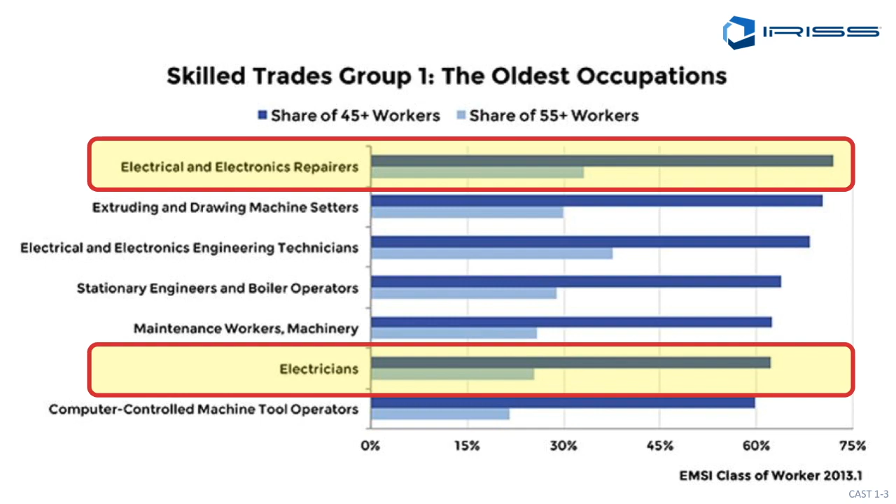Why do we need effective electrical maintenance programs? So obviously, for those who have been involved in maintenance and reliability for a long time, we have very well established mechanical reliability and maintenance systems. And if you look at electrical maintenance, it's sort of been the red-headed stepchild of maintenance for some reason. But that's changed slightly in the last few years, and we're seeing a quantum shift now towards people looking at the reliability of their electrical systems.

But this is the issue. The same old thinking and the same old results. What we're seeing now is the way we used to do things is not working. If you look at it, the equipment that we were working on 25 years ago is similar to the equipment we're working on now. However, there have been advances in the mechanics of the systems, but we're still utilizing the same maintenance. That doesn't work.

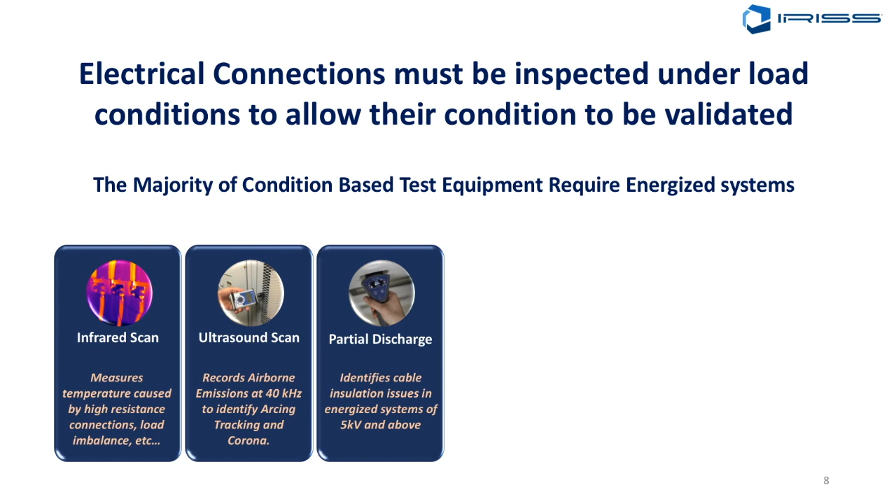Now, what we tend to look at in condition monitoring: we use infrared. Ultrasound, so with ultrasound we're looking for 40 kilohertz emissions. Partial discharge; now, partial discharge is typically over 4.5, 5 kV, but we can do PD inspections. Motor current analysis; this can be done energized and de-energized.

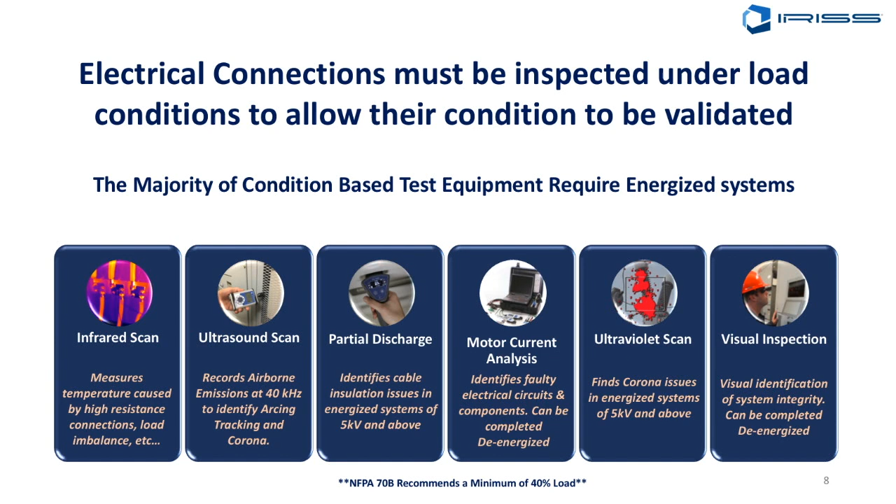Ultraviolet is being used extensively now, especially in the power generation fields. Again, it's for identifying corona over 5 kV. And the most important thing is visual inspection. So this is what we do. If you look at the core fundamentals of condition monitoring, these are the tools and techniques that we will use to identify the condition of the actual systems or circuits that we're looking at.

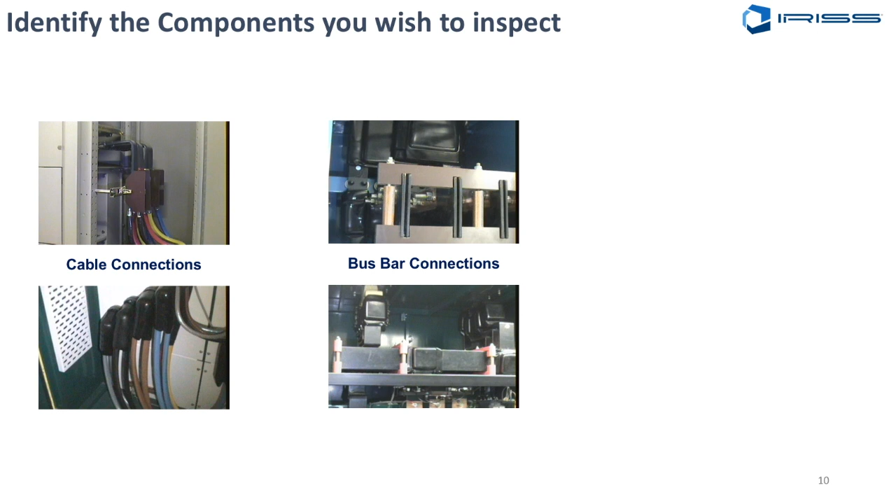So where do we start? Failure modes effects analysis. Now, with that failure modes, first and foremost, we want to identify the components that I want to inspect. So in electrical systems, they're typically cable connections, bus bar connections, and isolator or circuit breaker connections.

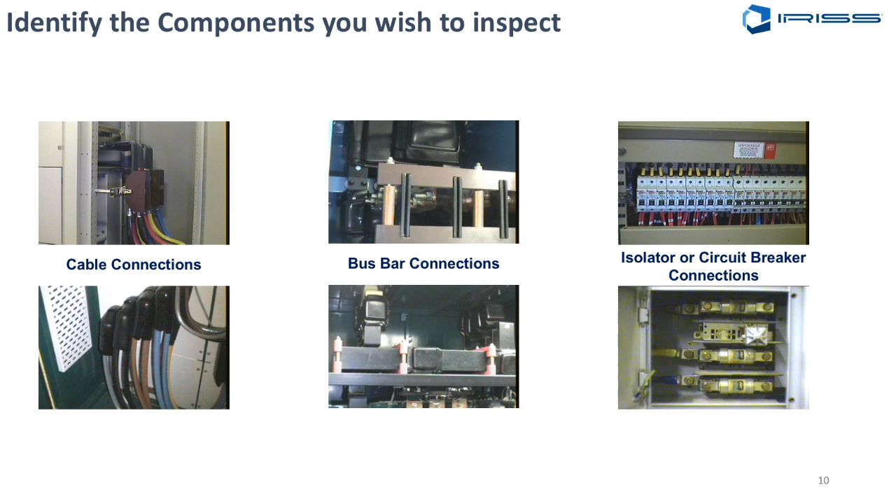Other than through human intervention, I don't really see bus bars failing or cables failing outside of their joints or connections, and that's a broad spectrum thing. There are systems that do fail like that, but again, these are typically where we're looking: cable connections, bus bar connections, and the isolator and circuit breaker connections, the mechanical parts of the system.

So what I have here is a good electrical connection. Traditional testing for this type of task, and we have to shut down. We can maybe do load bank testing, megger stress testing, tightness, torque checks, etc. There's a whole bunch of testing I can do on this circuit to show that it's correct. Now, all these maintenance tasks are designed to confirm whether or not the circuit connections are good and the systems meet its operational requirements.

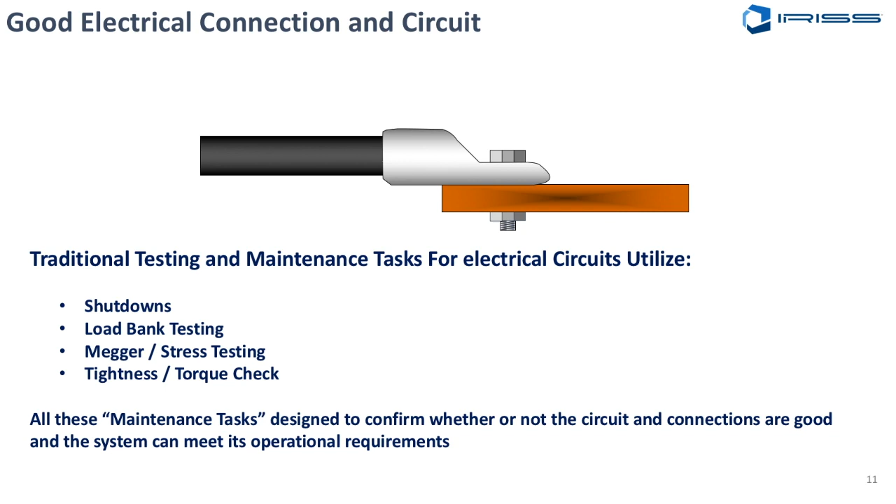Okay, so this is why we do this shutdown and this testing, but it's antiquated. You can only tighten a bolt or a screw or a nut so many times before it breaks. And we've seen people where they've tightened the connection because they think it's a loose connection, but it's not. It's a lug or something that's causing the issue. So there's better ways that we can do this.

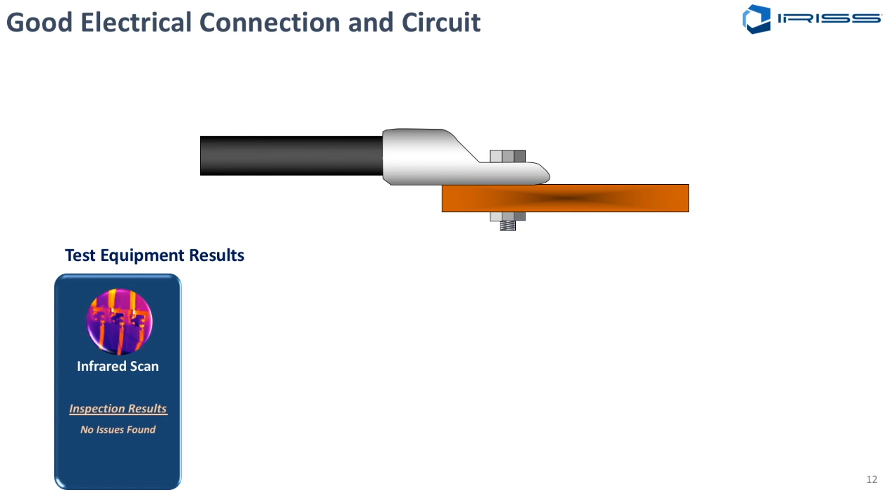Now, if we look at this circuit, I'm going to do this through condition monitoring. So the infrared shows 0, ultrasound shows 0, PD shows 0, motor current analysis shows 0, ultraviolet shows 0, and there's no issues with the visual inspection. Here I've done all of these tests, and there is nothing wrong with the connection. Now, that really to me means there's nothing physically that I can do from a maintenance intervention standpoint to make this connection any better. I've proven to you by looking at this connection that there's nothing wrong with it. So we just move on.

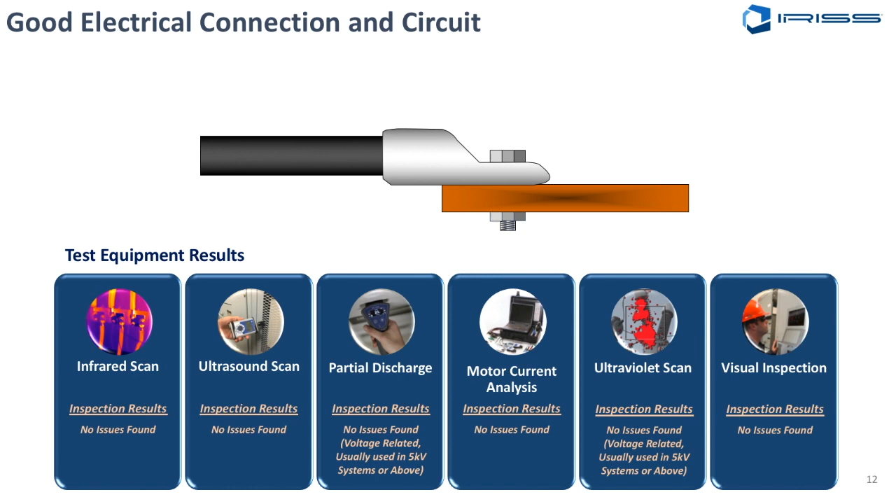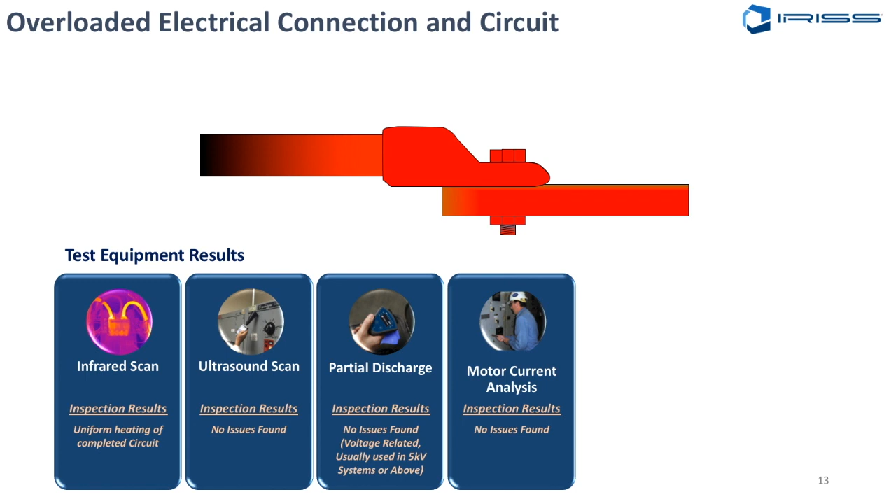Yeah, we move on. Now, if you look at an overloaded electrical connection, by utilizing the same test equipment, the infrared scan is going to show me uniform heating of the circuit. Ultrasound possibly is not going to show me a lot at this stage. PD, again, if it's over 5 kV, we might see them, but again, for overloads, this isn't really a circuit failure, this is a system failure. So we're not going to see anything. Motor current analysis, possibly not, only from the load readings, obviously.

Ultraviolet scans are not going to show me anything, and the visual inspection, only in super extreme cases where the heat damage has got so much on the cables, will we see the visual verification of that fault. So all of this we're looking at, and there's nothing wrong with it. So again, with this we can see an overloaded electrical connection, and we can do what's required to bring that back into the scope of works that's needed.

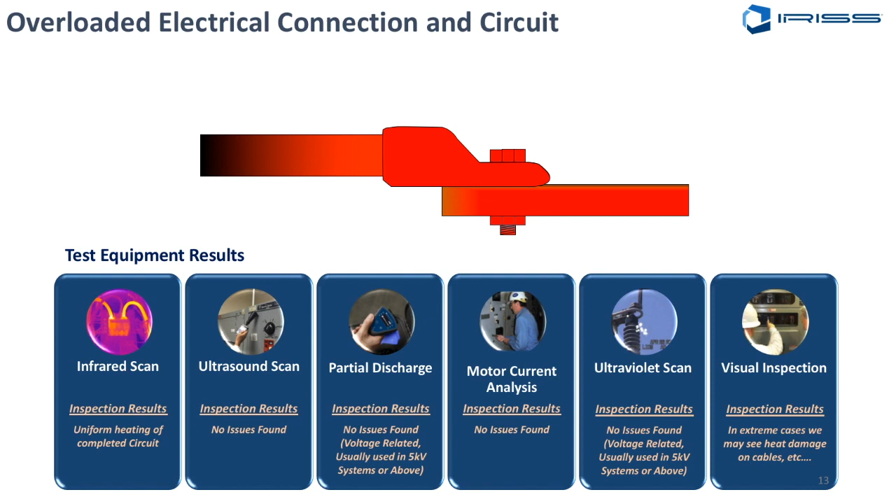Now, if you look at a high resistance or loose connection, here with the infrared, I'm going to see localized overheating. The ultrasound, again, I may find arcing, tracking, or corona. Corona obviously depends on the voltage, but on the medium to low voltage, we're going to find arcing or tracking in extreme cases. PD, possibly not, only if it's 5 kV or above. Motor current analysis, yes, I'm going to find this. Ultraviolet scan, again, only if 5 kV or above.

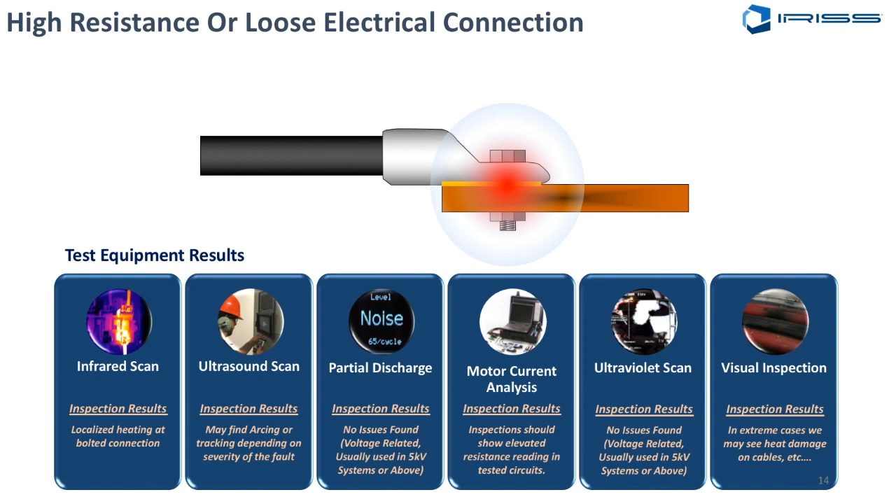And the visual inspection, again, in extreme cases where it's got that hot, where it's actually visually discolored the system, the circuit, we can see the evidence of that. So again, now I can utilize these condition monitoring techniques to show me if I have a high resistance or loose connection. Now, another area where we have some similarities is obviously a loose cable lug. That is going to give me identical results to a loose or a high resistance connection, but the actual high resistance is now in the lug and not in the bolted connection.

So I'm going to get all the same results. So what we say here is typically, as an electrical engineering firm, we would advise that if you find an overheated connection, you would actually cut the lug off. You would replace the lug so the whole system is good and rebuild it.

Now, the reason we do that is if you're shutting down to do this, the last thing you want to do is go back in and change it, and say you need another shutdown because it wasn't the actual connection that was loose, it was the lug. So, to save yourself embarrassment, just cut the lug off, replace the whole joint, and then you have a good system there in place.

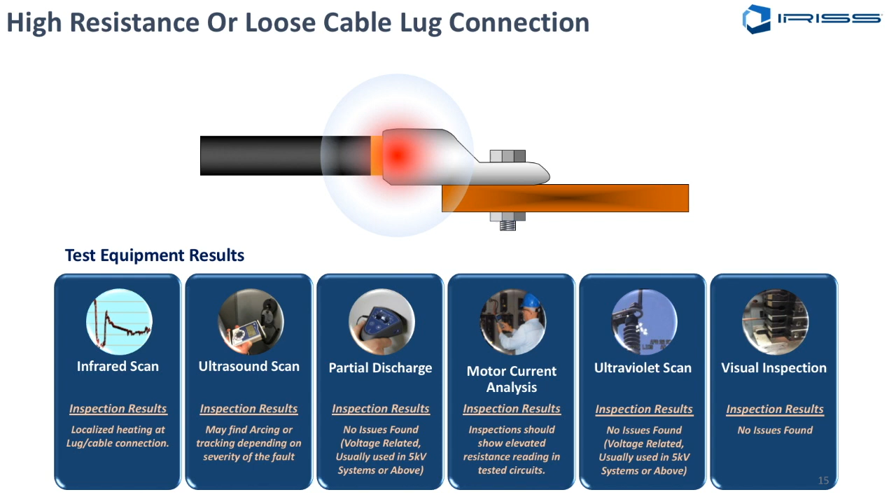Now, the final failure mode we're going to look at is partial discharge or cable insulation failure. Typically, partial discharge doesn't produce heat. Only in very, very extreme cases have I seen reports of heat being produced. But then we're getting into the arcing and tracking side of life. So typically in infrared, no heat.

However, with ultrasound above 5 kV, we're going to hear corona. Partial discharge scanning using PD or UHF scanning, we're going to see that again. Don't forget, PD is typically 5 kV or above. Motor current analysis, we're probably not going to see much. Ultraviolet scanning, yes, we will see something, again, over 5 kV.

And then obviously the visual inspection is super important, because the mechanical failures of partial discharge produce acids which produce residues, white residue, which a lot of electricians have seen. And this is very important to find. Okay, so very important to find, and it really underpins the importance of a visual inspection.

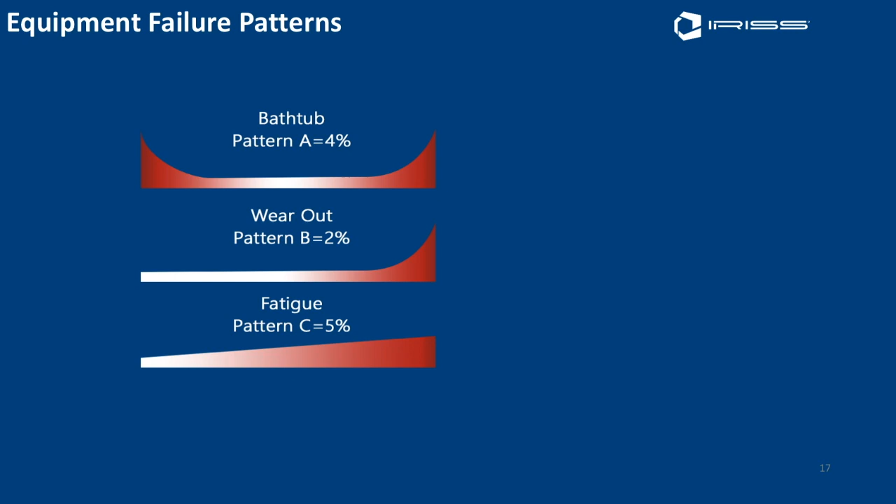So once we've identified the failure modes, we're going to start looking at failure patterns. Now, there are typical failure patterns. We have what we call age-related failures and non-age-related failures. If you look at these typical failure pattern curves here, you're going to see that about 11% of failures are age-related and 89% of failures are non-age-related. Now, these numbers can change significantly, but the ratios tend to stay the same, where age-related failures are responsible for a lot less of the failures that we see than the non-age-related failures.

So what that really tells me is if I'm using a calendar-based maintenance schedule, which is a typical mindset and thinking, I'm only going to find the age-related failures. That methodology of using calendar-based maintenance is typical of traditional thinking, which is the bathtub failure curves or the age-related failure curves. Therefore, that will deal with that. But what we've shown is, if most of the failures are non-age-related, then you're going to be condition-based to find these non-age-related failures.

So this is the quantum shift. Start thinking that way. Start thinking about reliability and maintenance as being two different things. And what we're trying to do now is use condition monitoring to assess the reliability of the system. That really is starting to look at finding these non-age-related failures, which are the cause of the majority of the failures that we're going to see in our systems over its life cycle.

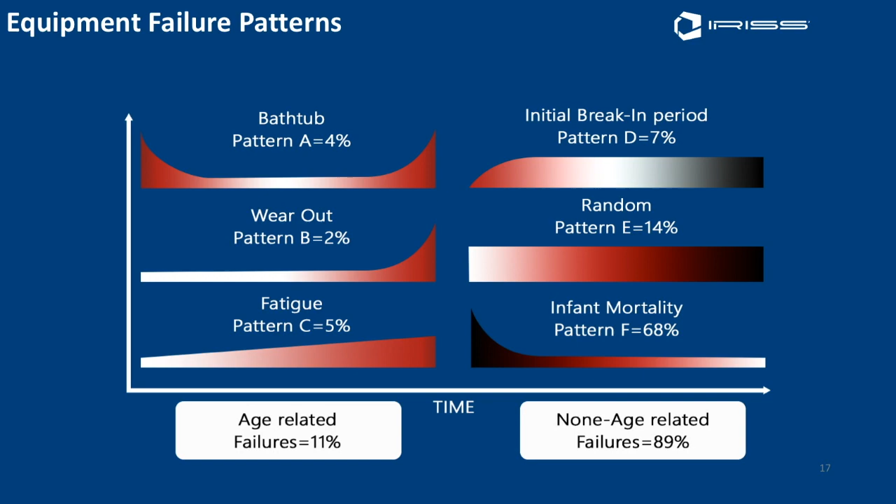Now, I'm going to introduce you to something called a DIPF curve. Most people call it the PF curve, but the DIPF curve is really where we've extrapolated that out for the whole life cycle of the system. So in DIPF, D is design. With design, people are now starting to look at, from an asset management standpoint, if we design it correctly, we're going to have it done right.

So a big part of design is getting the OEM involved right up front. The OEM is going to be there to really assist you on designing the reliability into your project. And these directly impact the following statistics. As much as 60% of failures and safety issues can be prevented by making changes in design. 80% or more of the facility's lifecycle cost is fixed during the plan, design and build phases.

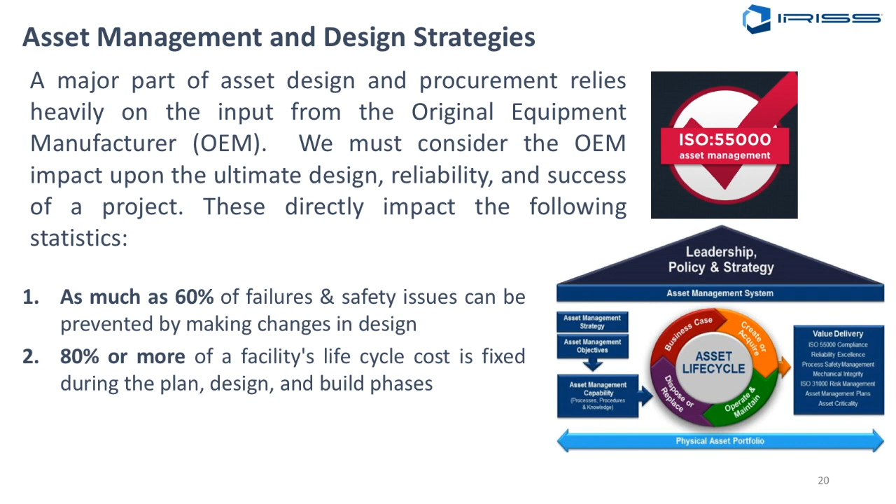So again, getting it right up front is really going to pay back over the total cost of ownership or the life cycle of the asset. And finally, 30 to 40% of equipment breakdowns are related to poor equipment design or condition. So again, getting it right up front at the design point of the life cycle curve is really going to give long-term paybacks.

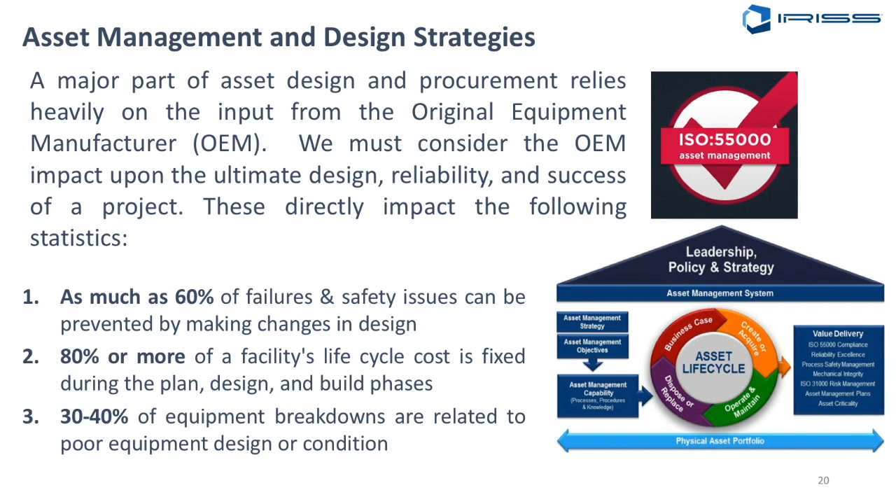Now, a term I hear used a lot is designing for reliability, so system design or design for reliability. Primarily there are three principles in system design for high availability engineering.

Number one is we try and eliminate single points of failure, to add in redundancy to systems, so failures of components doesn't mean complete or entire system failure. Secondly, we need reliable crossover points. Unfortunately, sometimes the crossover point tends to become a single point of failure, so high availability engineering provides reliable crossover.

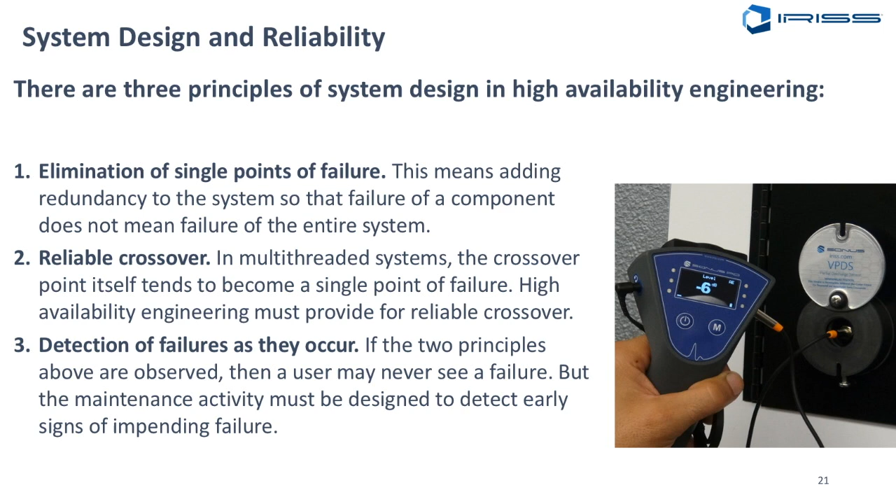And then finally, the detection of the failures as they occur is super important. So if the two principles above are observed, you may never see a failure, but your maintenance and reliability activities must be designed to detect early signs of failure. Now the I part of it obviously is the installation. So design and installation is a big thing on there.

And here we start to see, if we look at the DIPF curve, P is point of potential failure, F is a functional failure, and after functional failure we have total failure. In between installation and point of potential failure is what we call a proactive domain. That's where we're starting to do all this condition monitoring. Now when we find a problem, point of potential failure, then we're starting to work in the predictive domain, and then we go into what we call our fault domain.

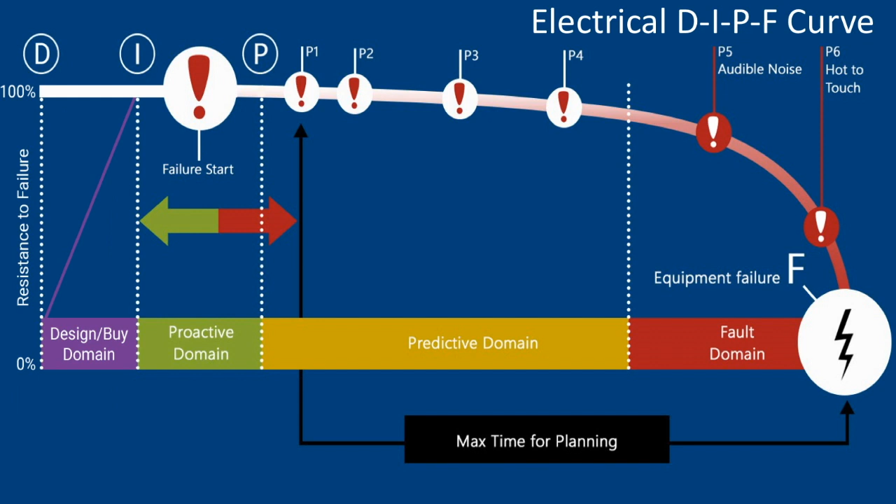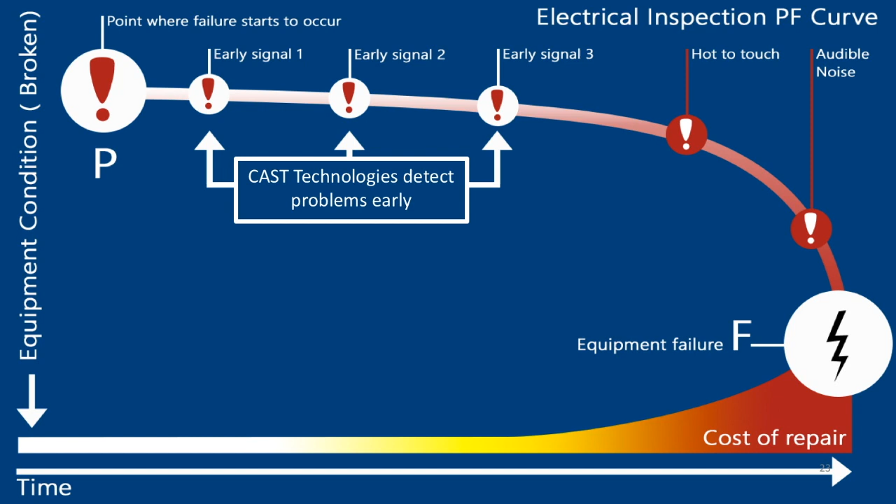So if we break into this a little bit more, we can see here that from the point of potential failure, we're going to look at these early signals, and I'm looking to utilize CAST, critical asset surveillance technologies, to detect problems early. So if we can find these problems early, we can repair them early. And obviously, if you look at the graph here, the bottom line, the cost of repair, the longer you leave it, the more expensive the cost comes to repair.

Now, breaking into the PF curve, let's have a look at early signal one. At this stage, we're going to use the primary tools in electrical inspections: ultrasound, partial discharge testing, infrared, motor current analysis or voltage and current measurement, and the visual inspection. So, using that equipment and looking at the results, we may detect corona, which sounds like this. And remember, corona is voltage dependent.

Your motor current analysis may start to show slight increases in the resistance measurements at this stage. There should be no abnormal thermal patterns detected. But all the time we're doing this utilizing EMSDs, electrical maintenance safety devices, such as IR windows, ultrasound ports, voltage tap-off ports. The panel stays closed and guarded all the time. It's a very quick and easy inspection done under full load condition.

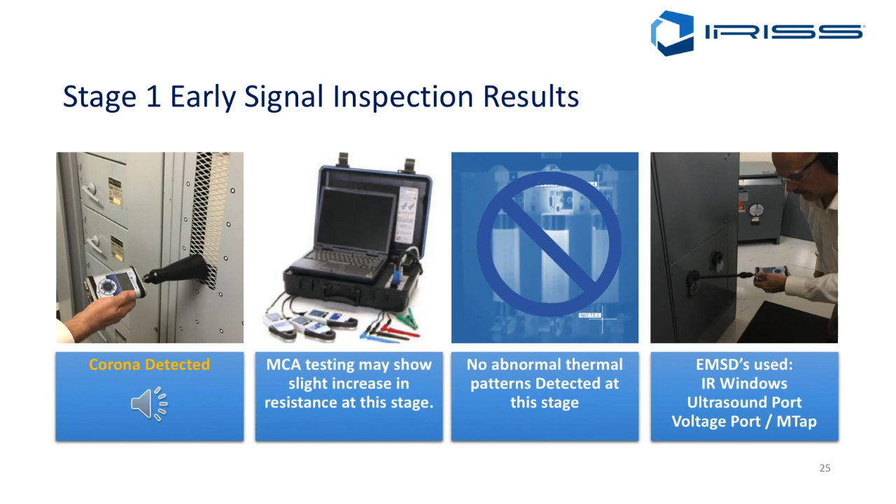Now, if we allow this to go further, we'll get to what we class as early signal 2. Again, we're utilizing the same equipment, but the results will start to escalate as we go down the failure curve. The ultrasound is going to hear tracking, which sounds like this. Motor current analysis should start to show differences in the readings that we would expect. And now we're going to start to see heat being generated. But again, systems are closed, fully energized. One person is doing the inspection through the EMSDs, so nobody's in harm's way.

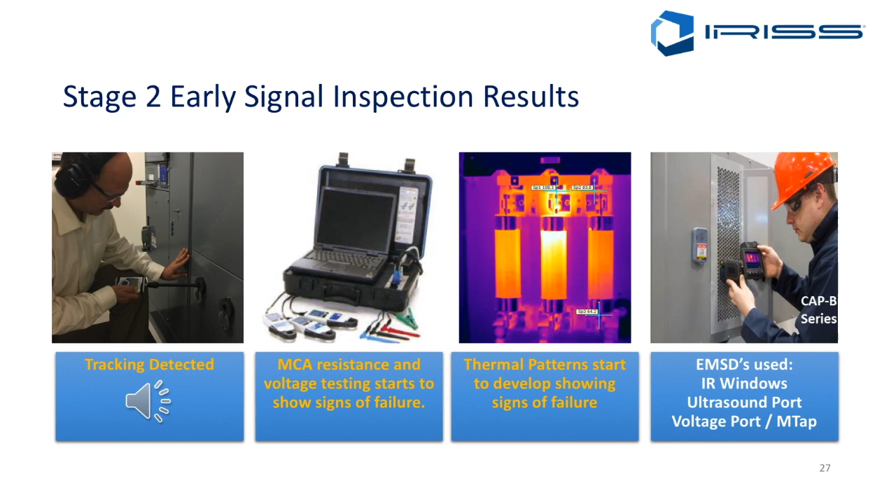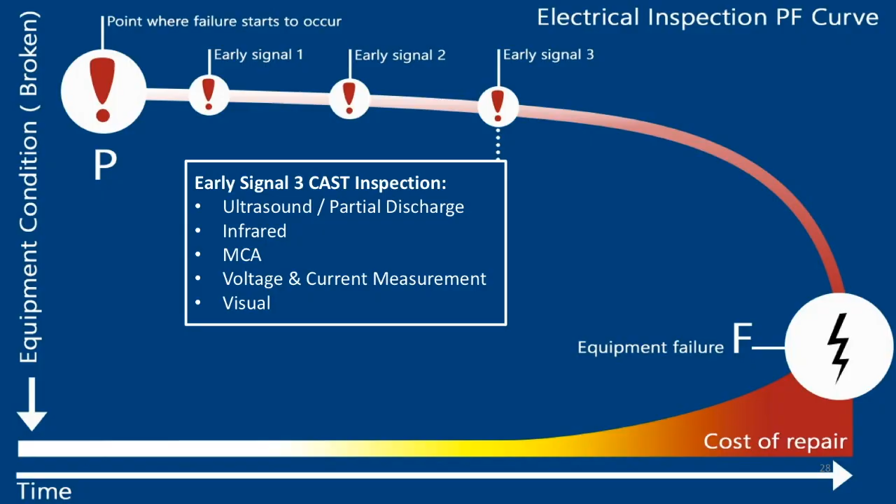So if we leave it to continue, we're going to get continued decay in the issues we're finding, up until the final stages of failure with an electrical system. So here we're going to hear arcing. Tracking will develop to arcing, and if you hear arcing, you're at the final phase of the fault. Motor current analysis readings are going to be significant again, and thermal patterns are going to be increasing.

Again, all the time utilizing EMSDs, the panel remains in an enclosed and guarded condition, and is relatively safe even in this dangerous condition. You definitely wouldn't want to open the panel where we are now. So arcing sounds like this. That's a very distinctive sound, and if you hear this, you definitely don't want to open a panel.

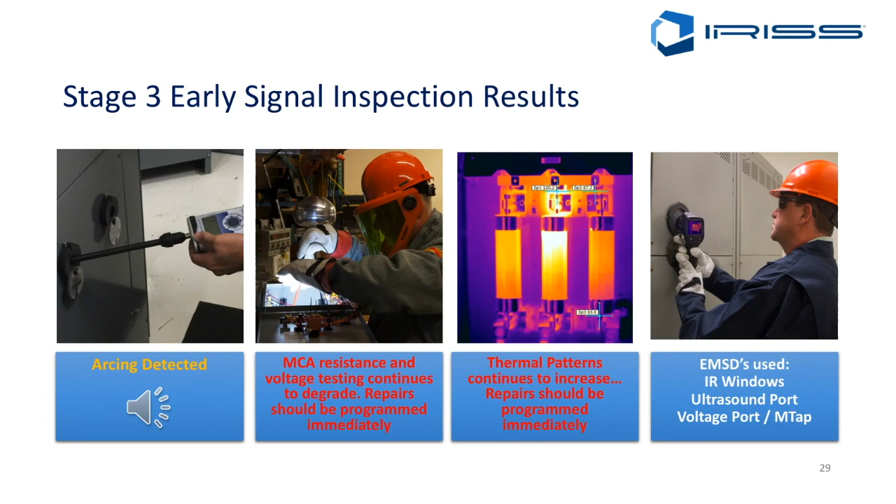So the final phase of failure is when we're going to start to see things be hot to the touch. You might smell burning. You may hear something. This is when the cost of repair is off the chart, and things have just gone too far. So the benefits of finding this stuff early is we repair it in a timely fashion, in a much more cost-effective manner, before things get any worse.

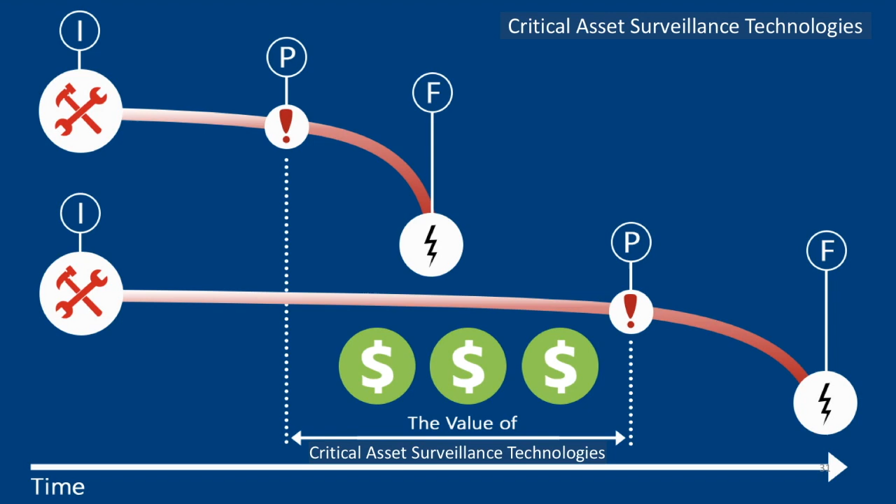Now, when you look at the true value of condition monitoring, or CAST, it is that we can extend the life cycle by finding these points of potential failure early, repairing them early, so no significant damage is caused to the system, and that way we can just build it out and it works fine.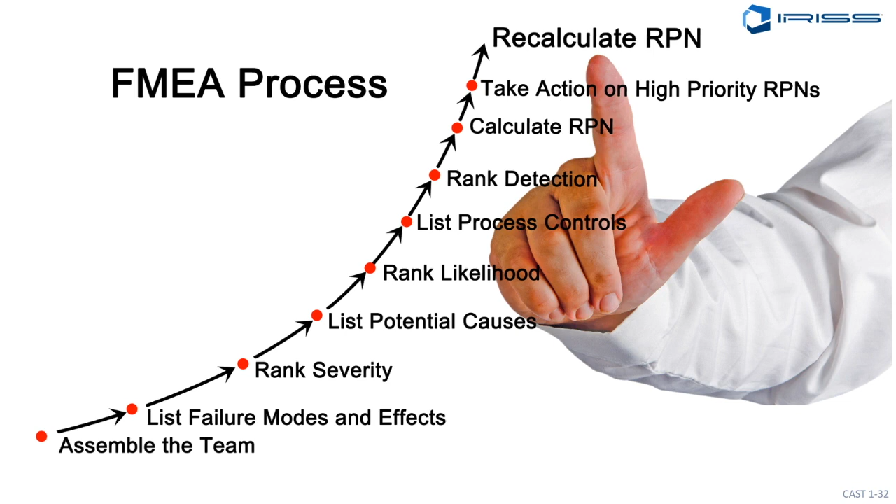So the final part: electrical maintenance now is very heavily risk orientated. One of the things we have to calculate when we're looking at failure modes effects analysis processes is something called an RPN, or a risk priority number. There are different ways of calculating this, but this is the most used. We typically use three areas. We look at the severity, i.e. the severity of failure from 1 to 10; anything affecting life or limb would always be a 10. But the severity is based on business risk, human risk, financial risk, whichever drives your facility.

Second thing is the probability number. So how likely is that fault to occur? From either historical analysis or mean time between failure data, there's lots of things that we can get for the probability number. And the final thing is the detection number. How easy is it to detect these faults? Okay, so each one of those carries a score from 1 to 10, which basically gives us an RPN of anywhere between 1 to 1,000.

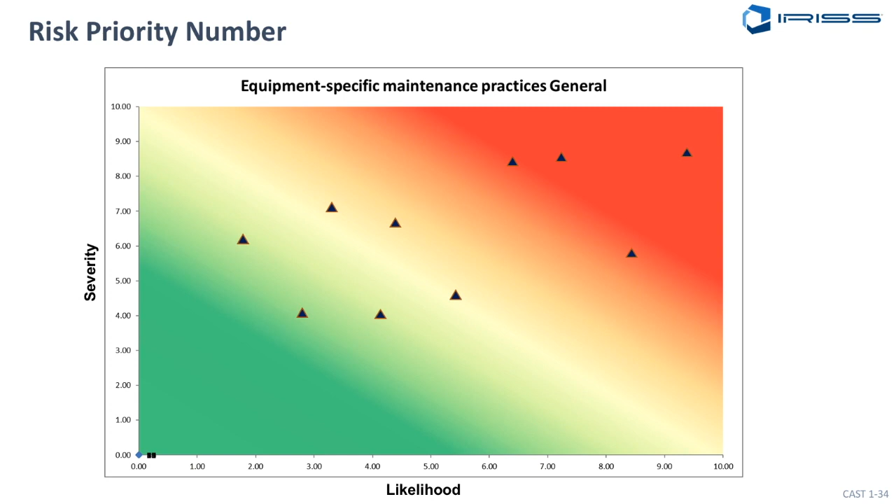Once we calculate those RPNs, we would plot them on something called a heat map, or a risk matrix. There's lots of different names for this. By placing them on this heat map, we start to look at something which many clients call the risk appetite. Risk appetite really is: you need to understand the risk to the business of the failure of your critical assets. You take the results of that risk assessment and utilize that in your heat map when looking at your maintenance and reliability requirements, and you would plot where your things are.

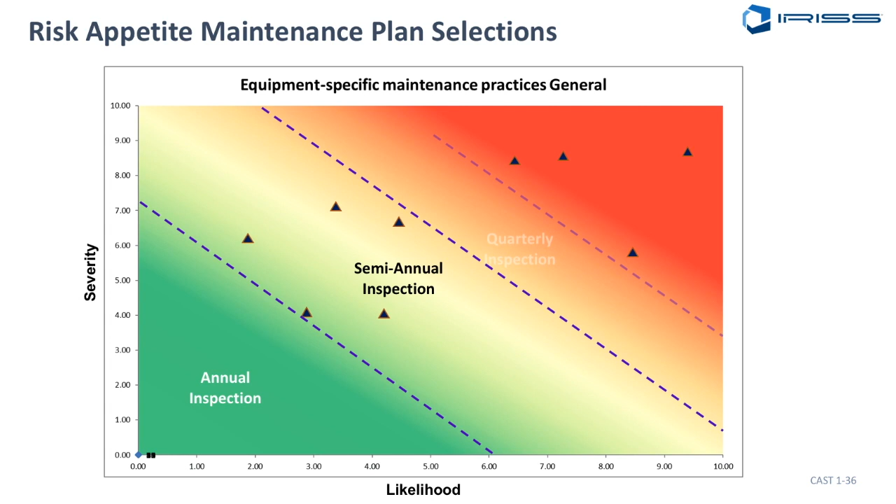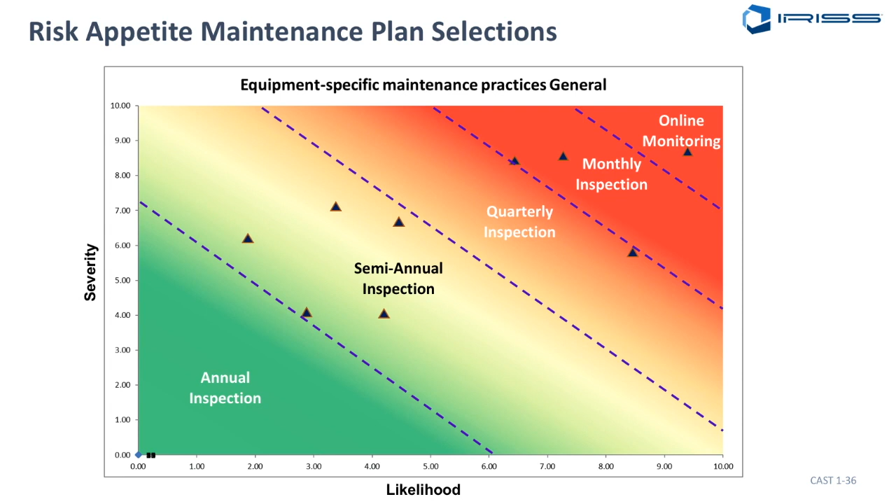So typically what we're showing you on this graph here is, for the first part, you might say we're only going to do that annually because there's no risk to the business. Then you might say semi-annual inspection, quarterly inspection, monthly inspection, or even go to 24/7 online monitoring and much more advanced systems. All of these will be driven by the risk priority number and your risk appetite. Be very much aware, if you have a low risk appetite, you will have a high maintenance or reliability bill. If you have a high risk appetite, you will have a low maintenance or reliability bill. They are adversely affected by one another.

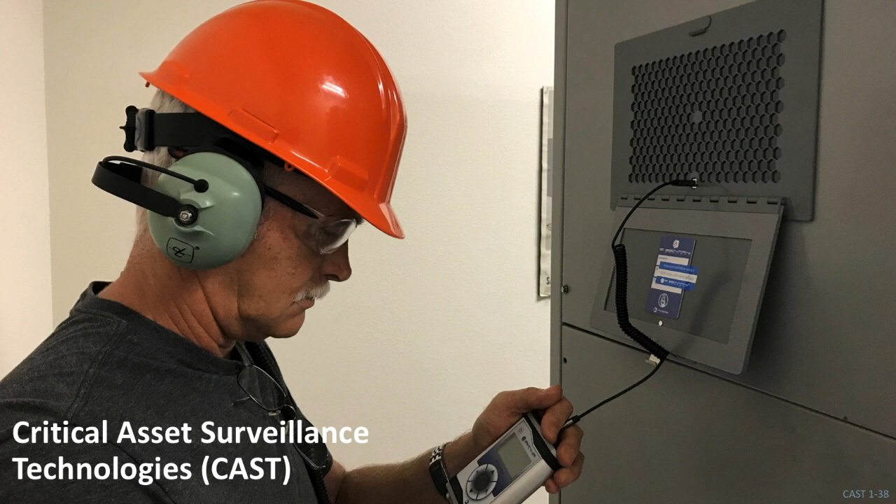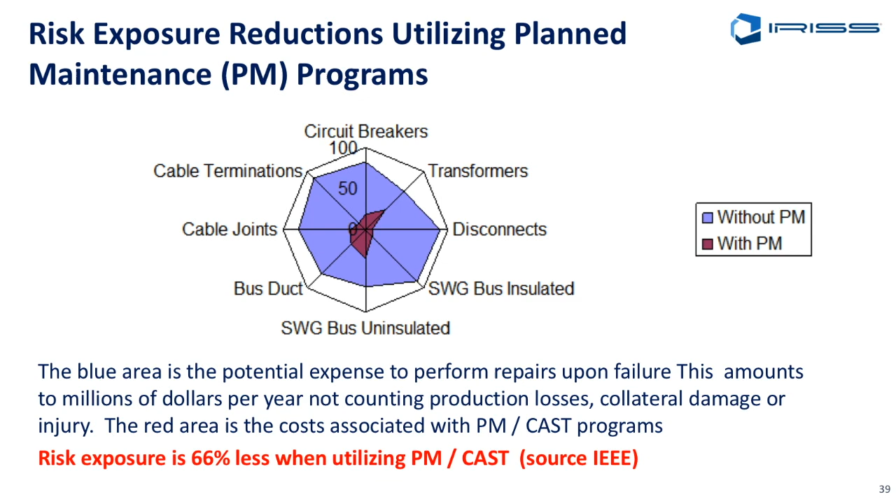What this study showed was there was a 66% reduction in risk when utilizing a planned maintenance or CAST system, i.e. reliability. So reliability engineering would show a reduction of 66% of risk, which really is pretty evident, because what you're saying is, we're going to look at this stuff more routinely. So if something's going to fail, we're going to find it early, i.e. using the P-F curve, and really it speaks for itself. So the results of this study are no surprise when you look at the strategy of reliability and condition monitoring versus calendar-based hands-on maintenance.

So what does CAST mean? CAST is a 100% surveillance repair model. What I mean by that is we only repair the faults that we find through routine surveillance of our assets. That really impacts the risk priority number, because the detection multiplier is decreased to a 1 because the EMSD, electrical maintenance safety devices, provide access for the inspection. So there are no issues with detection of the fault, and through detection, the likelihood of failure is reduced.

Significantly. So by utilizing CAST and EMSD strategies, we're going to impact the likelihood of failure and the detection of failure to very, very low numbers. So even if you're on a 10 on the issues caused by the failure, by having the other two multipliers much lower, the RPN numbers are going to be low.

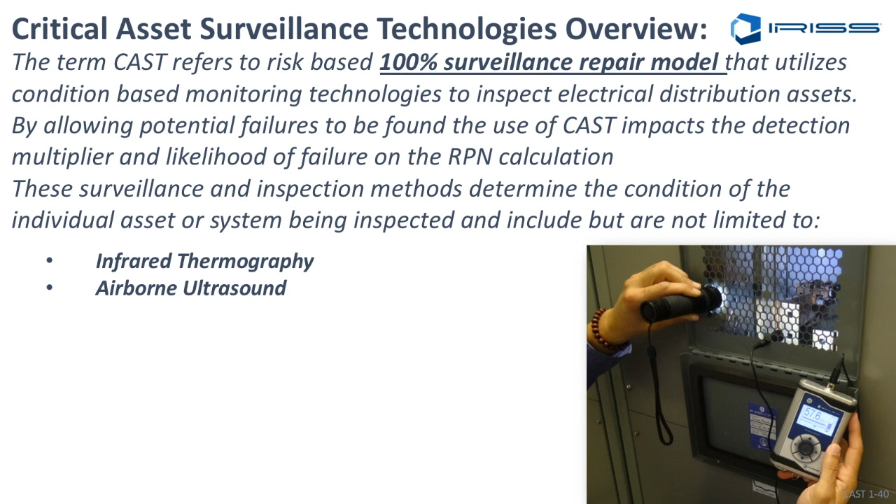So that's what we're trying to aim for here. So the surveillance methods that we utilize in a CAST program are like infrared thermography, airborne ultrasound, motor current analysis, PD testing. Power quality management is something you might do. Ultraviolet cameras, again, is something you might do. Vibration analysis, especially on rotating motors, etc.

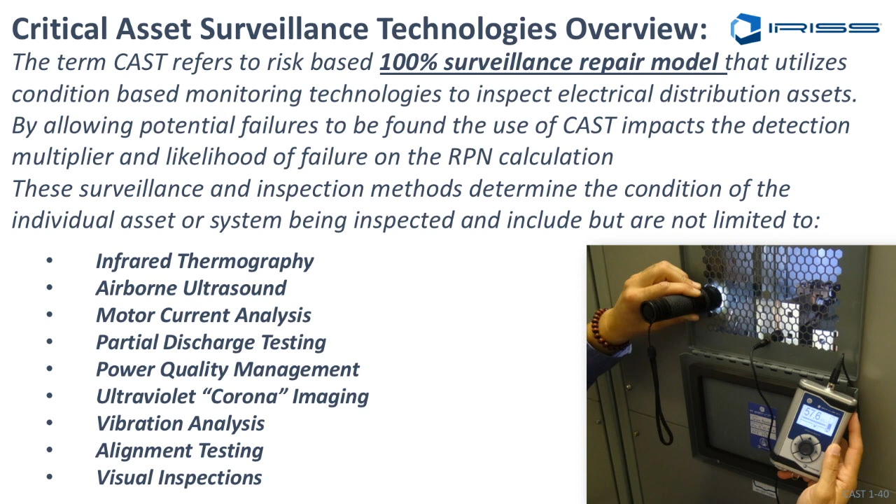The electrical faults will give a different vibration signature, and we can detect whether it's mechanical or electrical in motors, pumps, etc. Alignment testing, visual inspections. You can start to add oil analysis. All of these things can be brought into a CAST program depending on what you're doing. So it's not just limited to the things I'm showing you on the screen here.

So training is imperative, especially as we know we have a skills gap issue. So the CAST training program has been broken down into a number of levels. The first level basically is what we call the ICAST, Introduction to CAST, where we're trying to introduce the concepts of reliability and condition-based maintenance techniques. This is what we're trying to do, and the CAST training program is a journey.

It basically takes you from the understandings of the basics of reliability engineering and how we implement condition monitoring and how we implement EMSDs, and we start to grow that strategy all the way through to what we class as a CAST master technician. So for instance, the ICAST is a 3-day training course. No prior experience is required.

This is basically designed to teach data collection, utilizing condition-based equipment and EMSDs. Very easy, very basic, very simple. But at the end of that, the entry-level CAST technician will understand what's required of that position. Now, if you look at the training, 3-day course, as I said, we talk about environment, health and safety, introduction to reliability maintenance. We need to understand why we're doing this. That's the way these things work.

Then we go through all of the CAST technologies, and this is an overview. More heavily on the infrared and ultrasound and visuals, etc., and then the introduction to a lesser extent to things like vibration analysis, alignment testing, etc. So by the end of this, they have a great understanding of the technologies involved in condition monitoring. We talk about how to implement a CAST maintenance program.

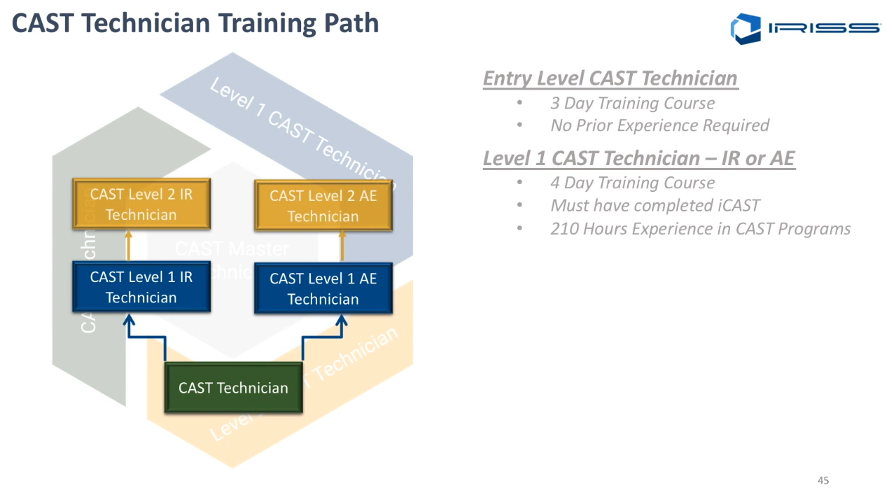Now, the next level is CAST level 2. So it's level 2 technician. So this will be a level 2 training course in either infrared or airborne emissions, a 4-day training course, and you must have completed level 1 in infrared or ultrasound.

Now, at this stage you're on the training path. So if you've gone on the infrared training path, you would now do a level 1 infrared, then do your level 2 infrared. You can't do a level 1 infrared and a level 2 ultrasound. You must have completed the level 1 course in that discipline and completed a further 420 hours experience in CAST programs as a CAST technician. Okay, so CAST level 1 technician.

Final stage of training, if you like, is what we call the CAST Master Technician. Now, the Master Technician is a 5-day training course, which really goes in depth on a lot more of the condition monitoring technologies. Again, you must have completed both level 2 in infrared and ultrasound. Okay, so if you want to do this, this is where this sort of training goes. There's 630 hours experience in the CAST program as a level 2 technician.

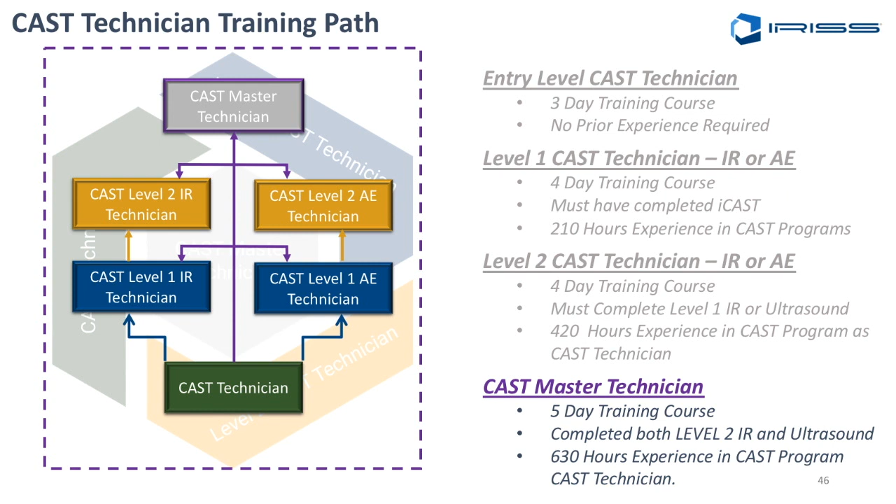This guy's then able to go back and train your level 1 technicians, do the ICAST, so you can then build in your own trainers within your system. And those trainers are supported by us at IRISS. So we really want to empower our customers and our clients to go forward.

So reducing maintenance-induced failures, okay? There is nobody on this planet that has never made a mistake. In fact, sometimes we learn more from our mistakes than we do our successes. So again, to err is human, and never a truer word has been said. So maintenance-induced failures are real problems in the field, and we're trying to find ways to reduce those.

Now, if you look at the latest version of NFPA 70E 2018, 70E actually has a complete section on human error, risk assessment due to human error. That's 110.1(H). And basically it shows that we address the potential for human error. We look at the negative consequences of people, processes, work environment and equipment caused by human error. And there's an informative Annex Q, which basically is human performance and workplace electrical safety.

So we're really trying to drill into this from a risk basis, and there's studies out there that say 95% of issues are caused by human error. Again, you can take that as you find it, but we must admit, even if it may not be 95%, human error and maintenance-induced failures are a big problem. And if we can get rid of those, it's a real positive step forward. So hence, this is where electrical maintenance safety devices start to come into their own.

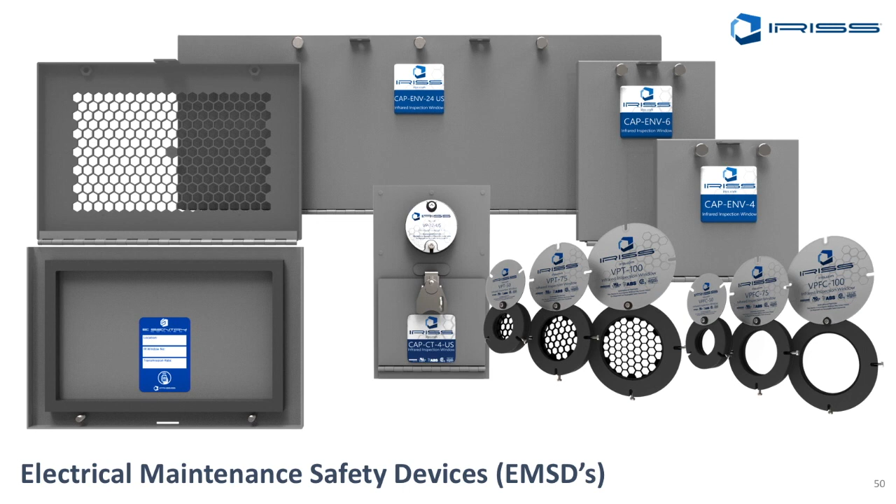There are different types of electrical maintenance safety devices. Obviously, we have maintenance inspection windows. They can be round or rectangular. They're infrared transmissive, visual, infrared, UV, can be custom designed, etc. So maintenance inspection windows is one area we go to.

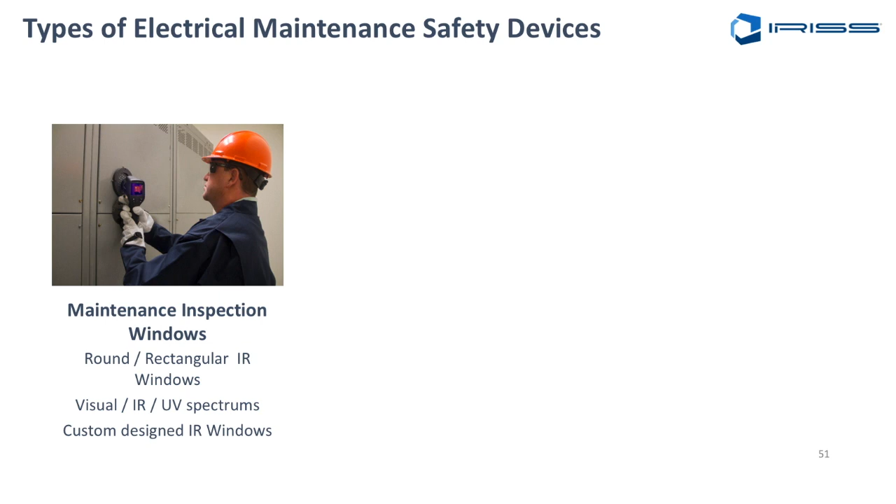The second is ports: ultrasound or partial discharge ports, external voltage indicators, motor current analysis tap-off points, power quality analysis tap-off points. All the time we're trying to bring out these data collection points to the front, and the safe side of the electrical panels that we're working on.

And then finally, we're really advancing into the online monitoring: temperature monitoring, asset tags, data management, vibration analysis, PD analysis, power quality analysis. This is really starting to grow with the industrial Internet of Things and the adoption of that within industry. People are starting to utilize the vast amounts of money their organizations have spent in online systems, and basically piggybacking the reliability data is a great way forward.

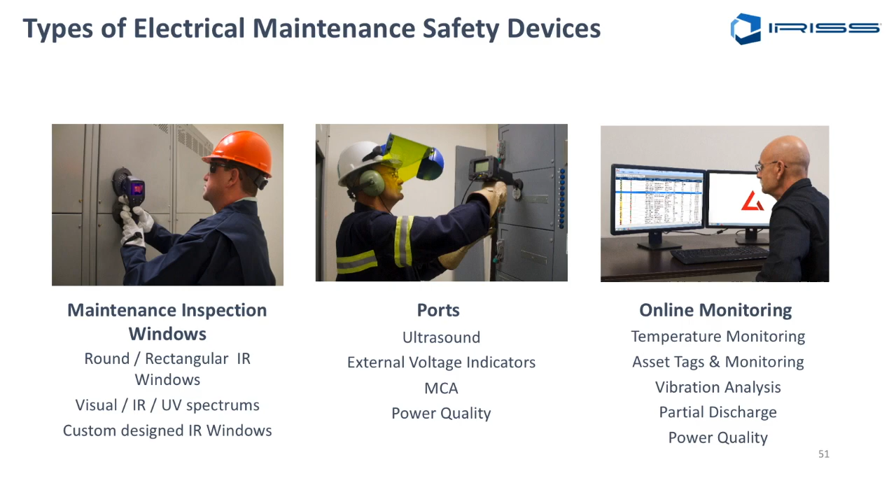So if you look at maintenance inspection systems, in this image you can see that the guy is looking in there doing a visual inspection, having completed an infrared, taking his ultrasound data through an embedded port. In here we also show a Delta T Alert system, which is online temperature monitoring, and we show an eSentry Connect system, which is basically the data management piece of this. And all of this becomes a maintenance inspection system, basically a data collection point for the health of the asset that you're looking after.

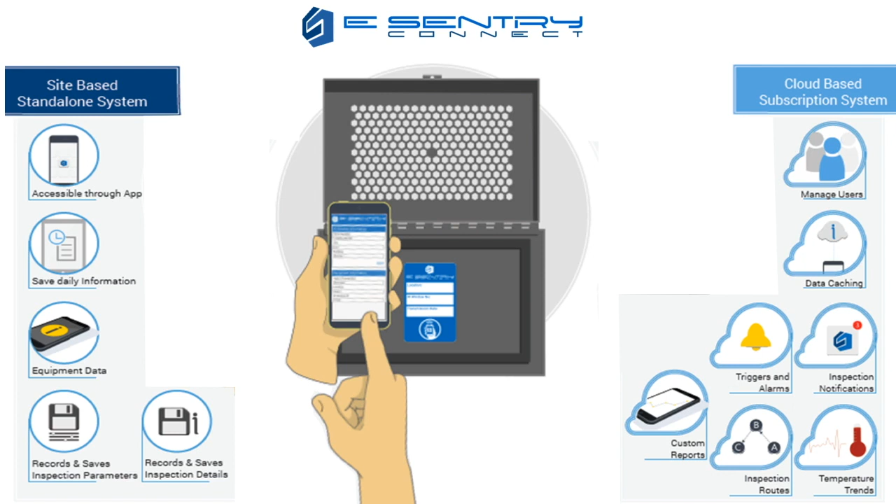So eSentry Connect, as I say, that's our system. It controls, it manages the data. It can be site-based or standalone or cloud-based subscription. Very useful system, manages the data of the inspection locally at the point of inspection. I have a record of the prior inspection, and I can do route management. There's all sorts of things we can do with eSentry Connect, and you can visit the website and find out a lot more about that. But again, this is about growing your inspection system.

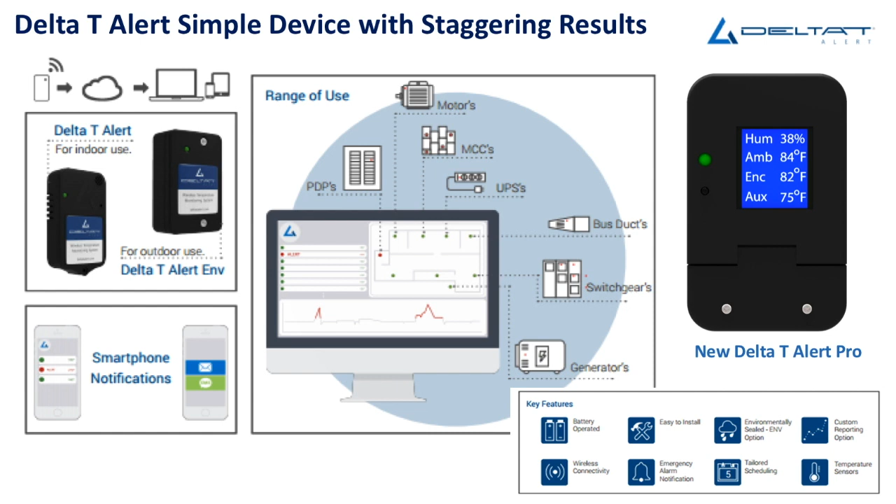Now, obviously, Delta T Alert is an online monitoring system, either for temperature, humidity, power, current measurement, thermocouples. There's a whole bunch of things you can build into this, and these are our IoT-based solutions that go within the mechanical systems of the actual maintenance inspection windows.

So as I stated earlier, 70E is a real risk-based standard now, and by working with EMSDs and CAST programs, we're working in the finer points of the hierarchy of control, fundamentally through elimination and substitution. Okay, so this is where we're trying to move CAST and EMSD programs to.

We're trying to make it safer for the people using it because we maintain enclosed and guarded systems, and we're also trying to maintain the data that comes from these inspections and minimize the skill sets required for the data analysis piece. Yet we then have allocated our primary skilled engineers and electricians, mechanics, etc., who go in and fix things. They're not involved in data management unless they're needed to be. Yeah, they're involved in fixing the problems and keeping things running.

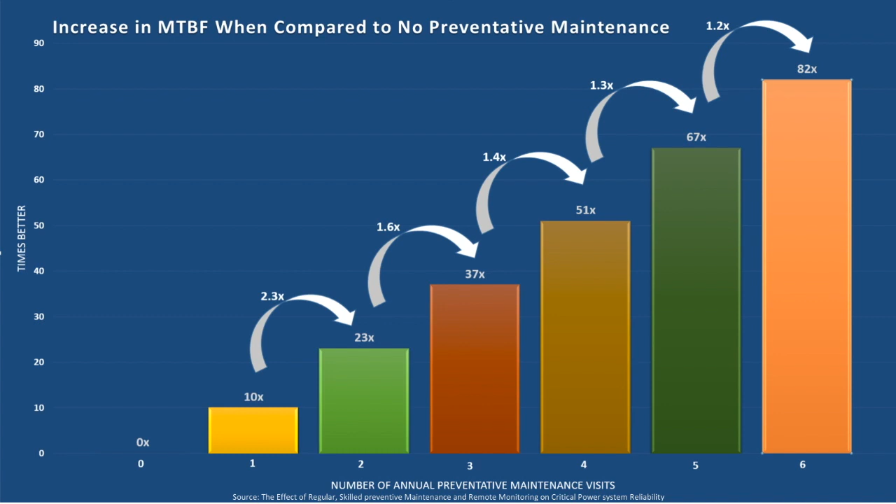Now, there was a study done by Emerson that showed the effects of regular skilled preventative maintenance combined with remote monitoring on critical power systems reliability. And basically we were looking at the effect on mean time between failure. How does this work? What their study showed is that if I was to put online monitoring on a system and, let's say, do quarterly inspections through an EMSD, which makes it really simple to do, we turn hours into minutes basically.

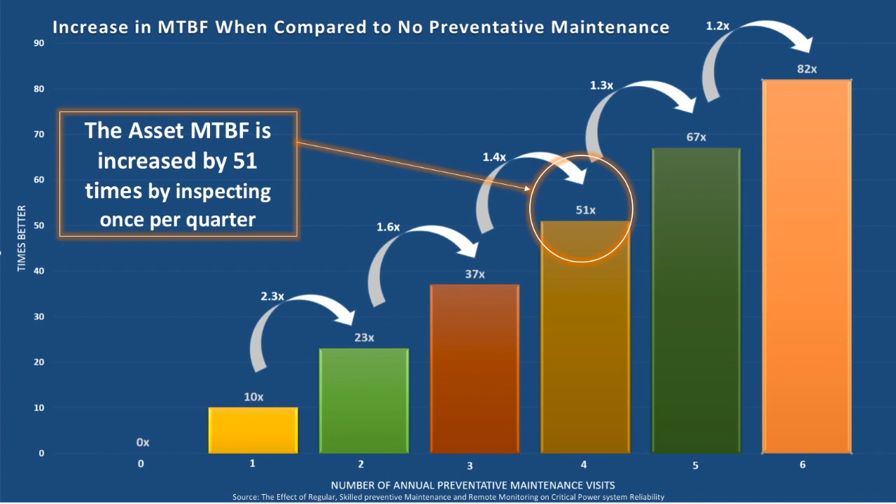By doing a quarterly inspection, we can increase mean time between failure by up to 51 times. If I wanted to do a bi-monthly inspection, I can increase MTBF by 82 times the original MTBF. So these are very, very significant figures. And if you're involved in power management and you can't afford a shutdown, then utilizing these systems is really going to give big payback to your organization.

Now, when we look at asset management, we have a thing called total cost of ownership. And one thing that surprised me was where these allocations of costs were. Direct costs such as acquisition, research, design, production, test, and construction, I historically always thought that was where most of the money went, but actually it wasn't. It's in the indirect costs or invisible costs. So, for instance, the operations and maintenance budgets, testing and support, spares, inventory, training, software, disposal, were actually responsible for the lion's share of the total cost of ownership. And in some instances, these numbers were vastly different to what I thought.

Now, these can change significantly depending on the industry, but one thing is for sure: the indirect or invisible costs are always significantly more than what we see up front. If we break that down, by getting involved in CAST and EMSDs to utilize very simple data collection, we're going to have an impact on some of the primary areas, i.e. operations, maintenance, testing and support, spares and inventory, because we're going to be working on condition-based data. So that is probably responsible for about 75% of the invisible or indirect costs.

So if we can have an impact on the lion's share of our indirect costs, then we're going to have a real impact on our total cost of ownership. How much depends on what we do and how we do it. But one thing is for sure, condition monitoring of electrical systems utilizing CAST and EMSDs will significantly impact the indirect costs of total cost of ownership, and is one thing to be considered very carefully.